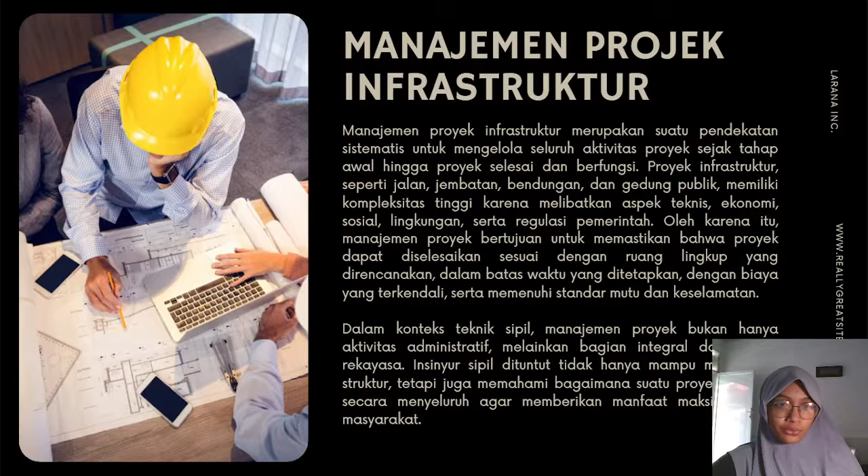The other reason why I'm using English - again, I'm trying to yap my way out of this 1 hour video, but I'm realizing now it's not the best choice of action, because my professor actually knows how to speak English really well. It's pretty cool. I'm just spiting on other people, and I'm just hoping other people would skim through my video and not actually look through this. Do I care about speaking coherently? Not really. I don't have any respect for the English language, and yeah, I'm trying my best. I'm not editing this, sorry.

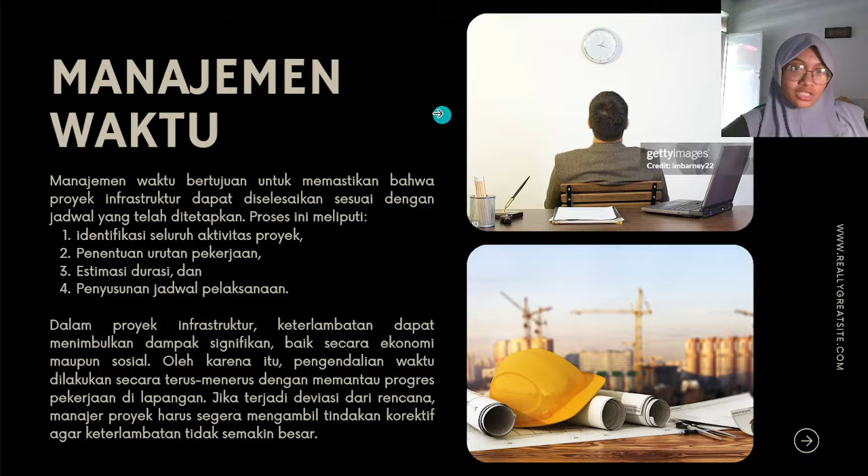I have nothing to say. Management and time. Management time. Yeah, you can see this guy looking at a clock. That's how I visualize this whole thing. That's another way of me saying I'm running out of images to use.

And I clearly, you can tell, just random hard hat again. Good old trick never fails me.

So yeah, management time. You can't be late because if you're late, you're paying people to do stuff that isn't efficient. That's not a great sentence. Kind of like, yeah, you're just wasting everyone's time, and that's gonna affect your budget and stuff, and you're just gonna have to carry it out, like how they rushed the ending of Stranger Things season 5.

You can't do that. It's a good thing they were just planning a TV series and not a construction project, especially in infrastructure, which we have learned is big and long and takes a lot of time. You can't deviate from the plan. It's a really sensitive thing because from our earlier planning, you can't deviate from this, because anything else that you do that's not according to plan is probably not efficient.

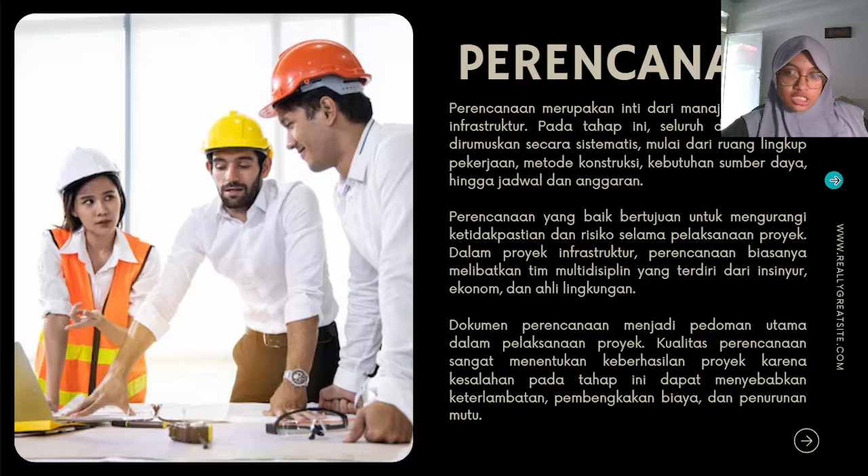This is assuming you've built a good enough plan to begin with. Again, I'm counting on the fact that people watching this can't speak English, because they'll know I'm not talking anything coherent. I'm just hoping that they're just skimming through. Again, I'm just talking to burn time, and I don't think I have more to say in this slide. And I'm running out, frankly. But next slide.

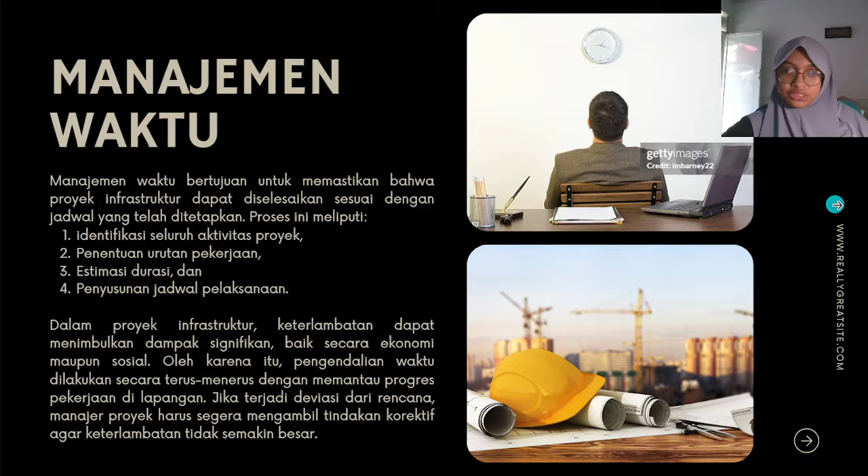So we figured out how to manage time and budget money. Well, they really didn't figure it out, I just kind of told you that you have to manage these things. The rest is for you to figure out.

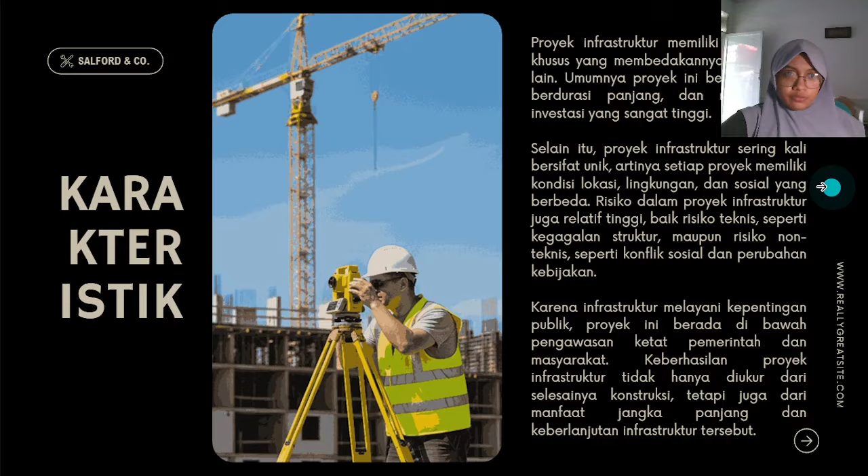So we have learned about the process, the phases, the steps that go into an infrastructure project. Now these are only mainly about the management. Construction, there would be a lot more stuff detailing about, first of all, the studies that you can do.

Have I actually said that? I think it was in my first take. Okay, so this, like the studies that you can do - I'm going to go to my last slide so it doesn't seem like I'm looping the video. Oh yeah, I forgot to, oops.

There's actually a lot more studies that you can do, as I've said, either technical or non-technical - you have to do all of them. Like if you want to build a bridge, first off, I guess the non-technical survey is done, because that's where you get the problem from.

You figure out if people really need a bridge, or if a bridge would really decrease the time they spend going around an island, which can easily be fixed by a straight bridge useful for people in that area. That's how you know what you need.

You do a survey, and the technical studies. Some examples would be, for a bridge, you need to do the geology of it, and hydraulics as well, because you're dealing with water and construction in a body of water, so you need to take that into consideration. You have to figure out how the water behaves, how to make sure your bridge doesn't just go off to the sea, how to make sure it lasts, and what kind of foundation to use at the bottom of the water. That's what hydraulics is for. Also what's the rain there, because that affects the water current and how it behaves, so we build a bridge that can properly manage that, last long, and actually work.

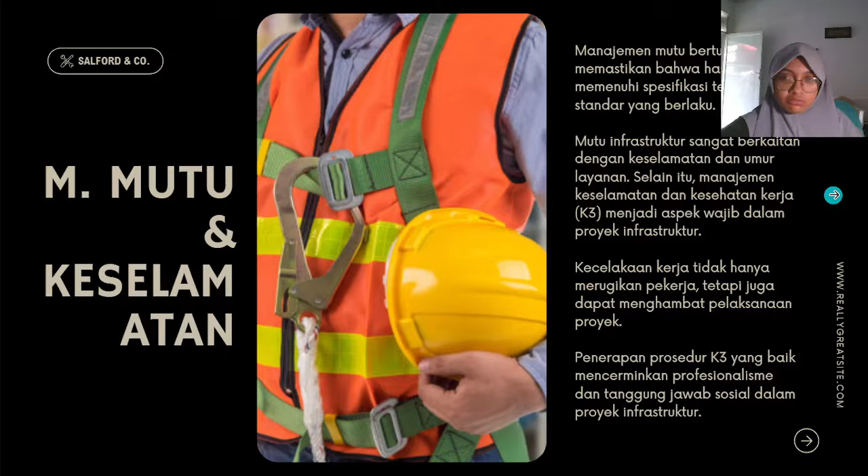I'm not entirely sure what civil engineering is about. You have to be safe, you have to monitor for falling planks that might happen, or maybe just holding your friends' hands very dearly as you support them through something in their life.

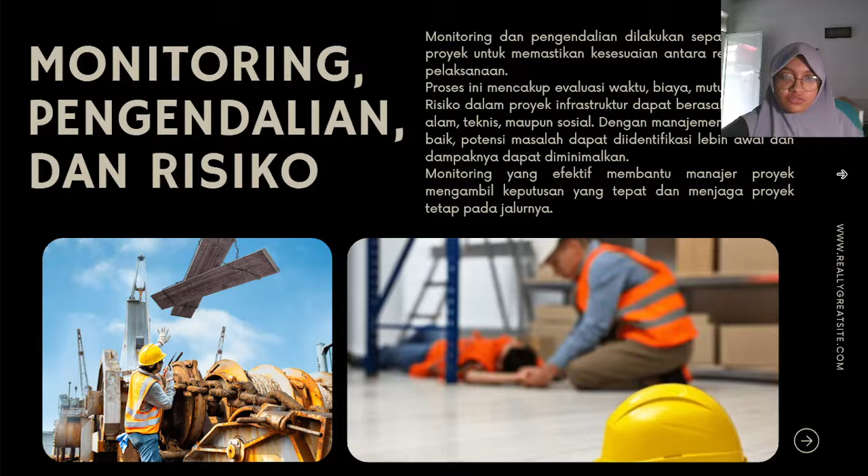I don't think I have anything else to say, but I still have half an hour I need to burn, so I'm just going to talk about things.

A presentation is a formal and informal communication method that involves conveying information, ideas, or a message to an audience.

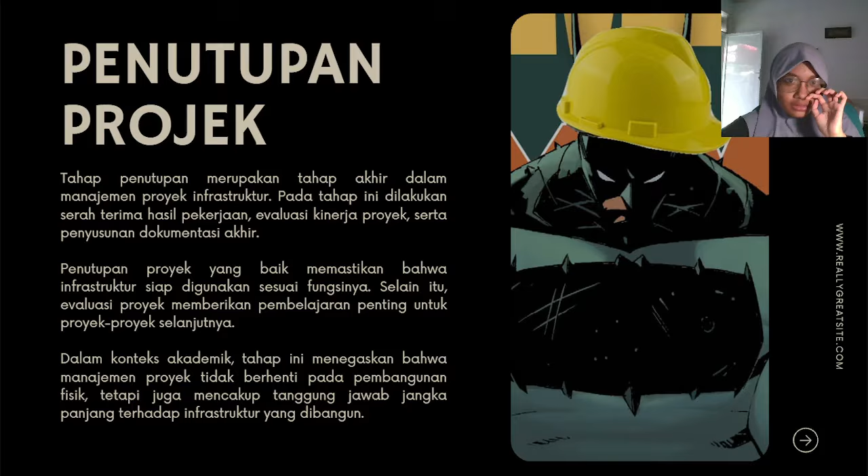I told you guys I have this intermission. Well, it's not necessarily an intermission anymore, since an intermission happens in between, and this is happening at the end. So I'm just going to talk. I don't want to loop the video, I feel like that's cheating, so I'm going to try my best.

I'm going to talk about the things I know in Materi Infrastruktur Sipil. Again, my voice is gone, it hurts.

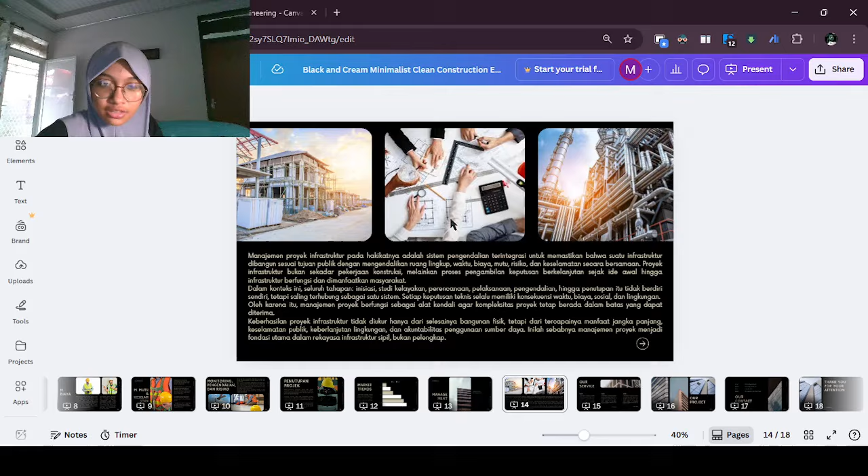Sorry for my leg, I'm sitting really comfortably right now. What else? Hold on, look, I even made a whole new slide. Look at the effort I'm putting in. Wait, okay, to actually read it.

More stuff about infrastructure project management.

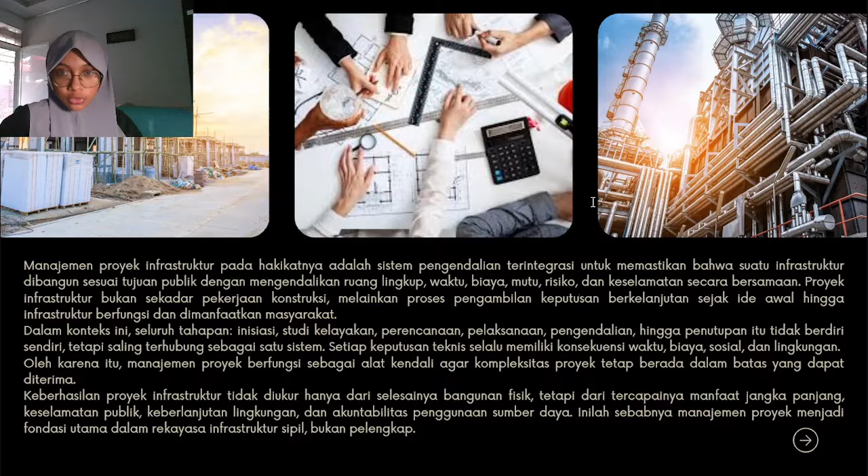Sometimes it is a technical aspect failure. Take the case of the boarding school that took a lot of lives, and frankly never really got any justice served. The people directly responsible, well not the managers because there weren't really any, were the people who made choices and changes to their buildings even though it was not suited for them at all, it could not adapt to the changes they wanted. So in return a lot of people died, and they got away with it. So that happens from a technical aspect, but there's also another play in there, the cultural stuff, the religion that plays into that, how they can actually get away with it is a direct cause from the environment and culture in that area, and how civil engineering sometimes isn't taken too seriously. It's always more about religion rather than other things that help out in the construction of a building. There was no proper calculations, there was just greed and zero consequences for it, and frankly it's really sad to see. But that's one example of it being a technical mistake.

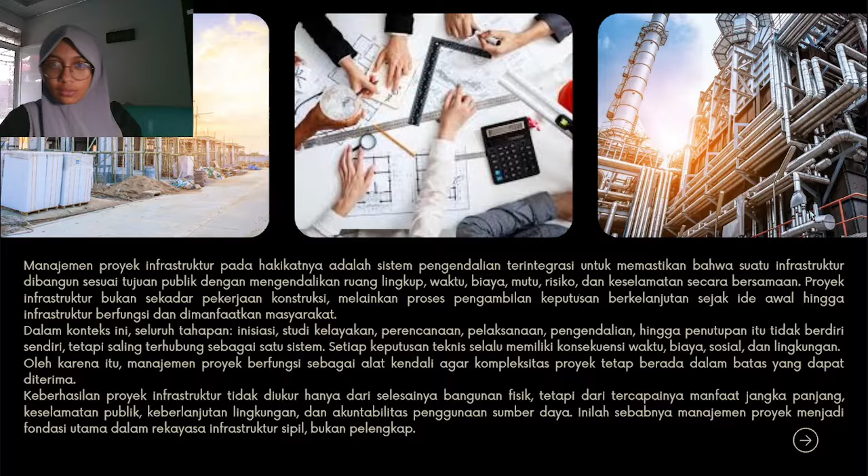Not a technical mistake, but in other cases they just didn't pay enough attention to the social conditions that influence the technical success of a project.

So technically, sometimes outside of a technical problem, failures can also happen because of the social environment of the infrastructure.

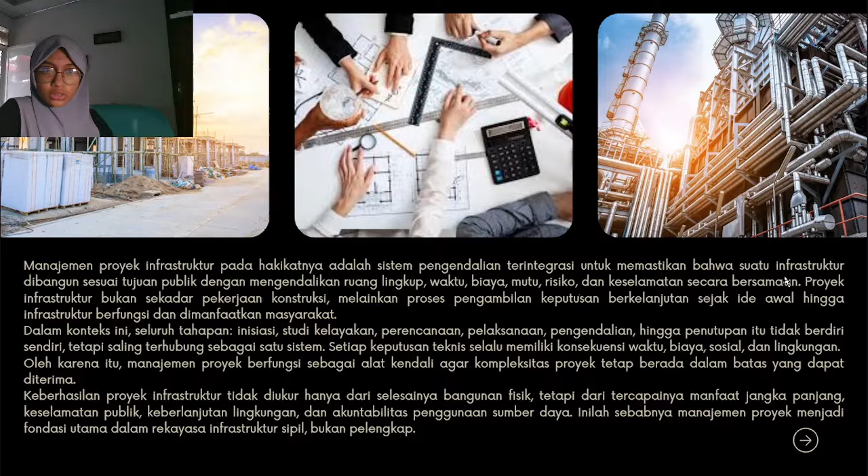I'm pretty sure my professor made an example of that, I forgot what it is, but it's like a building in Kendari. It's standing, I guess, but it's just not used at all by anyone. I think it's a place where you can put in suggestions about the surrounding city's development or something like that. I forgot what it's called really, it's kind of far into town.

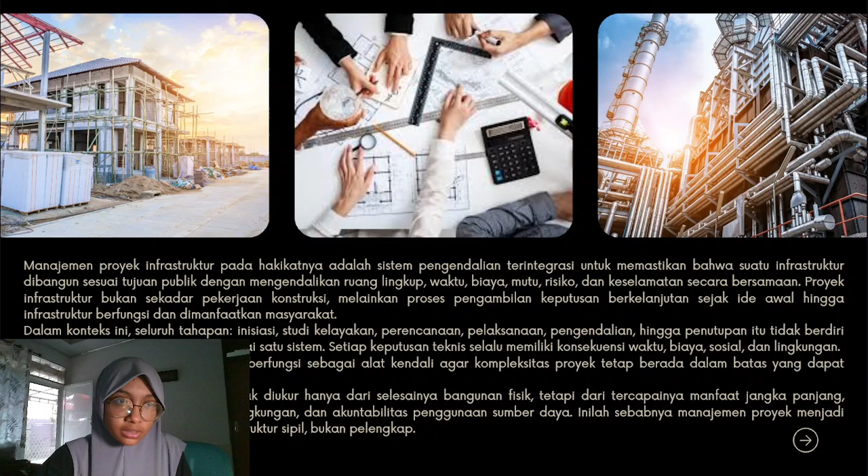Yeah, so you don't just leave the buildings as is, but it's just an ongoing project. I think that is another way to view it.